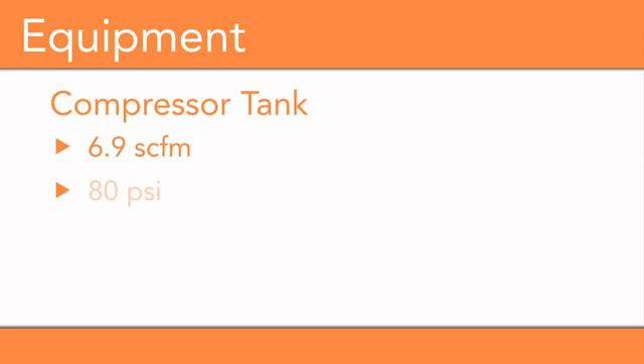To achieve the specified look and finish, a few equipment minimums need to be in place. You need a compressor that will output 6.9 standard cubic feet of air a minute at 80 psi. From the compressor to the pressure pot, you'll need a 3/8 inch inner diameter hose. Standard length of this hose is 50 feet.

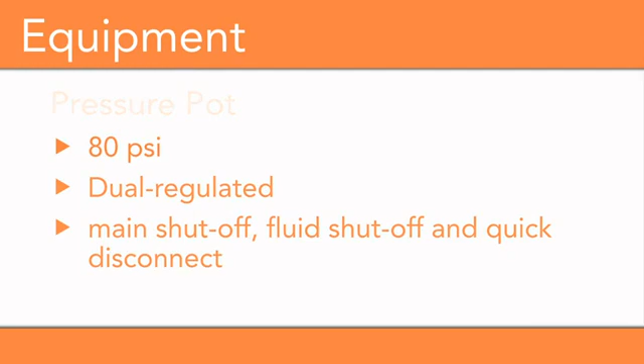Your pressure pot needs to be a minimum 80 psi and dual regulated with a main shutoff, fluid shutoff, and quick disconnect. From the pressure pot to the gun, you need a 25-foot 5/16 inch air line and a 3/8 inch fluid line. Finally, at the end of the hose you need a gun.

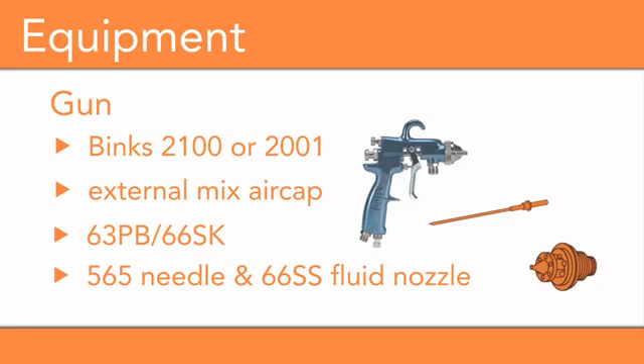All settings are based on the Binks 2100 or 2001 with external mix air cap, 63 PB or 66 SK air cap with a 565 needle and a 66 SS fluid nozzle. You can also use the CA Technologies Lynx, also known as the Lynx Multicolor L100C with a 1.8 fluid nozzle.

Before mixing and applying MicroTex, be sure to read all application and safety instructions. Once surface has been uniformly primed with a white primer, hand stir all contents and box material. Do not use a mechanical mixer or shaker. Pour directly into the pressure pot. Do not strain and do not thin.

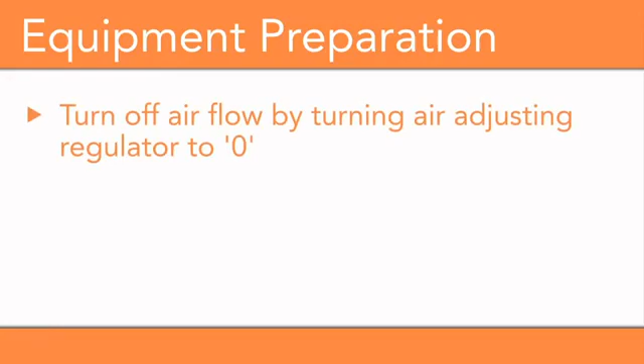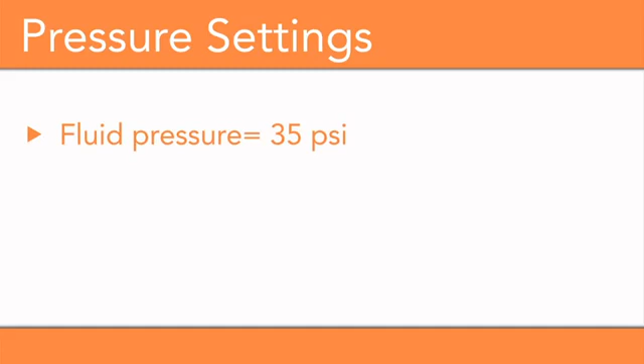Turn off airflow by setting the air adjusting regulator to 0 and turn up fluid pressure. The fluid, air, and fan control knobs on the gun must be set to fully open. Pull the trigger until a steady stream of paint flows from the gun. Adjust both fluid and air pressures, with fluid set at 35 psi and air set at 50 psi.

On typical walls, spray vertical passes using a 50% overlap at a moderate to quick motion at a distance of approximately 12 inches from the substrate. Avoid spraying a thick coat. If this happens, the small particles may become buried and hardly seen. Release the trigger halfway at the end of each spray stroke and slowly pull in the trigger all the way. This will allow for a smooth transition from section to section.

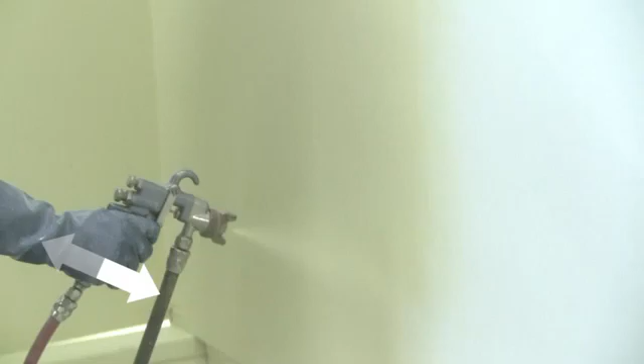Allow material to dry and compare with control sample. 2 lighter coats will give better coverage than 1 heavy coat and allow the fleck to be more noticeable.

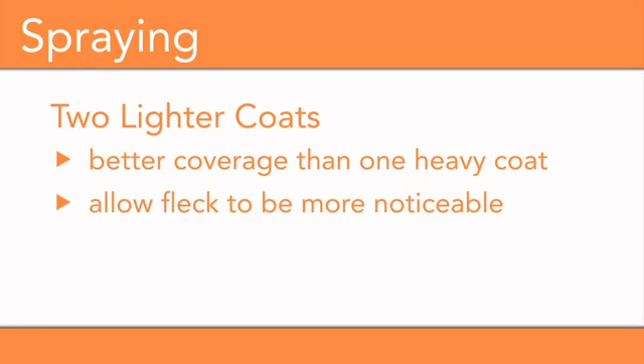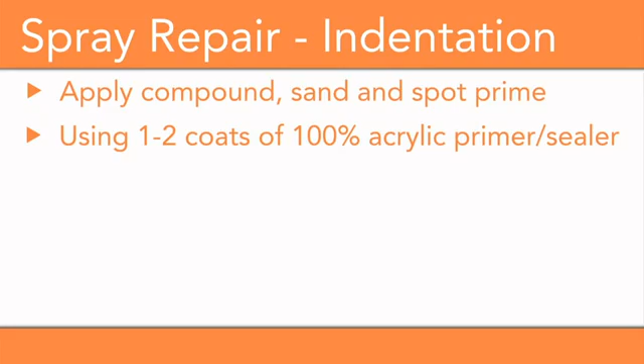Spray repair. For an indentation, apply the compound, sand and spot prime using 1 to 2 coats of 100% acrylic primer sealer. Following instructions for setting up the gun for typical application, apply 1 light to medium coat and allow to dry. Apply a second coat using the fluid on-off method mentioned above, which will softly blend wet into dry. Do not leave a hard edge.

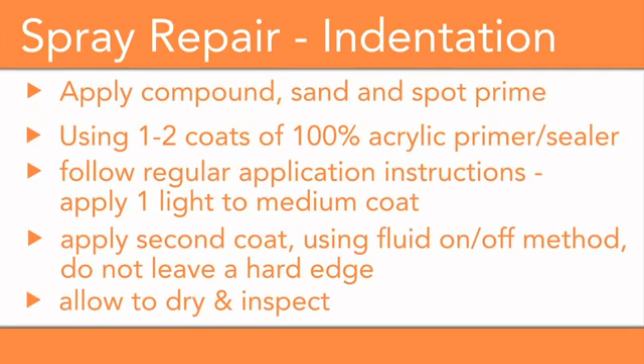Allow to dry and inspect. If full coverage has not been achieved, give another light pass. Where very small areas need to be touched up, especially if they are not at eye level, lightly rolling a couple of coats with a small roller may work as well.